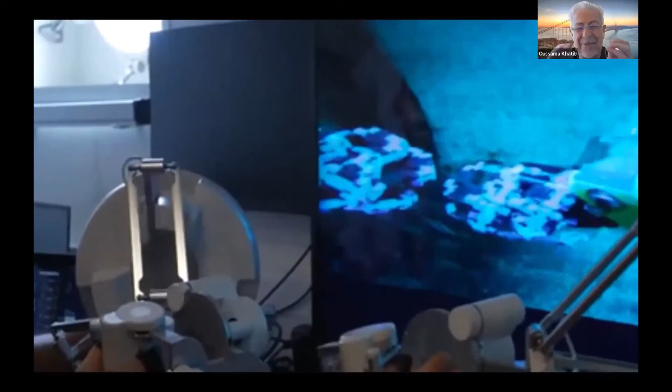Forward, down to the right, like forward. Slowly, we're almost there. Your hands on the... in the back. I have to come from the back to rest. Okay, I touch it. I feel it. Yeah, I mean with the back of the hand. You can feel it, put your hand. You can see the hands deforming, and you can feel it. It's amazing, you see it, and you are able to feel the contact. That was really, really incredible.

To experience. What is happening is we still have our old habits, and our old habits is that we are used to program robot joints to create trajectories, synchronize these trajectories to move. And this is not the natural way of controlling robots. So we need to take advantage of the new capabilities that is being offered to us. All this journey, I feel I'm still doing my PhD in robotics.

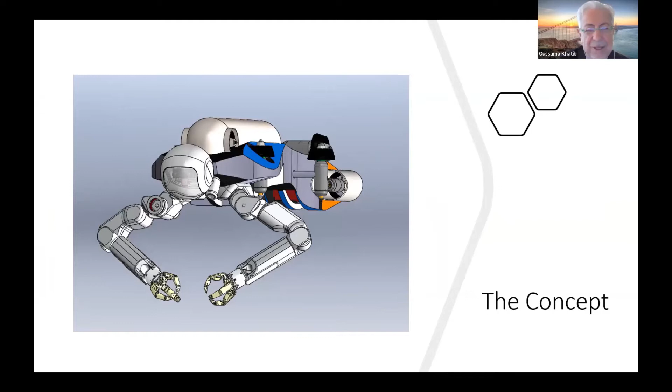The way archaeologists reach it is using a suit, which is very difficult to go inside because it's confined. To interact, you have these very simple grippers. It's very difficult interaction, whereas divers and archaeologists need to touch, feel, and interact with artifacts in much more dexterous ways. So we designed this robot to be a combination of mobility, manipulation, sensing, and vision.

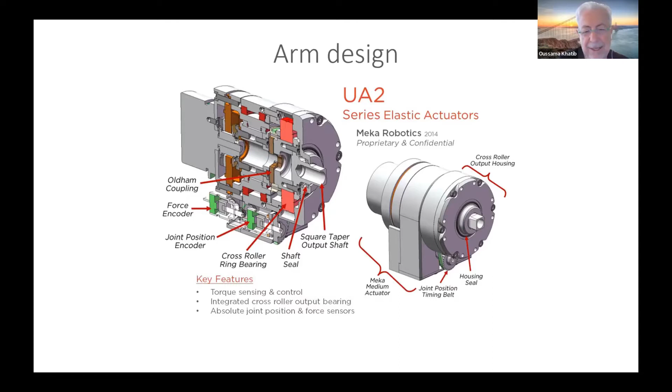This robot involved a lot of sensors. It's a very complex system, but we can also talk about the fact that this robot had to sustain the pressure, which meant a lot of new ideas in the design of the actuation and the hands.

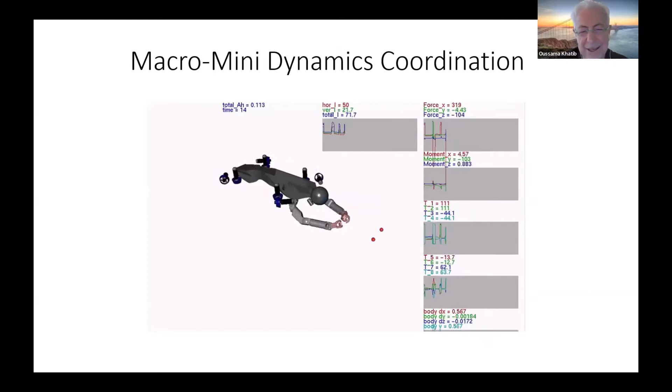The key aspect of the design is that when the robot is docking on any location, you can see the body of the robot still moving. There is coordination between a macro-mini dynamic system that allows us to take advantage of the fast dynamics of the arms to stabilize the system and make contact without exerting large forces.

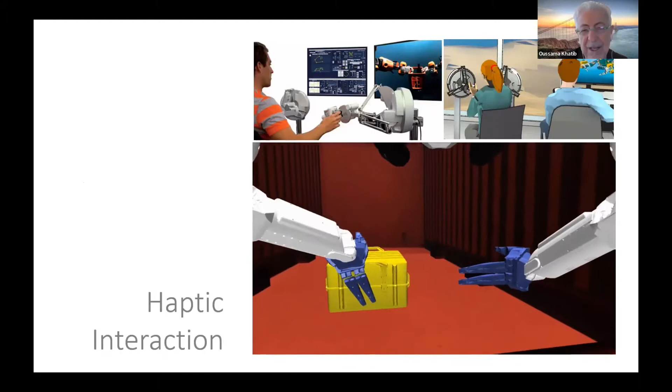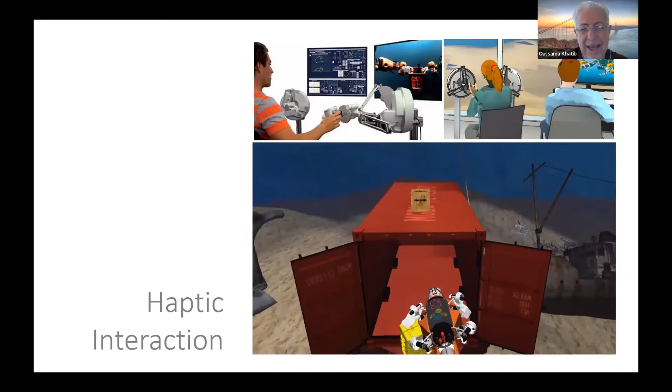OceanOne is here - that is the original one that was in the pool at Stanford. Most of the early development went through haptic interaction, involving dynamic simulation of the robot, so you can feel the objects you are holding and lifting. When visitors came to my lab, this was the highlight of the demos, because you wear these glasses, see in 3D, and interact with those environments through your hands and eyes. Everyone was able to do it, even a little child.

This was easy because of the way the interface was designed. There is a lot of dynamics reflected at the hands, and when the hand is extended, the dynamics become large. The effective mass at interaction becomes very important, so we had to make sure we take postures that reflect lower masses at contact.

When you combine two hands to hold an object, you change the dynamics again. We call this the augmented object dynamics, which allows us to control the robot properly.

The robot was deployed at sea on the André Malraux. Here you can see an image of the robot between the two cannons of La Lune, and also the haptic devices with which we interact - they allow us to touch and feel through the hands. When the hands make contact, we feel it in the haptic device, and it also helps guide the robot when needed. We also have stereo vision that allows us to see.

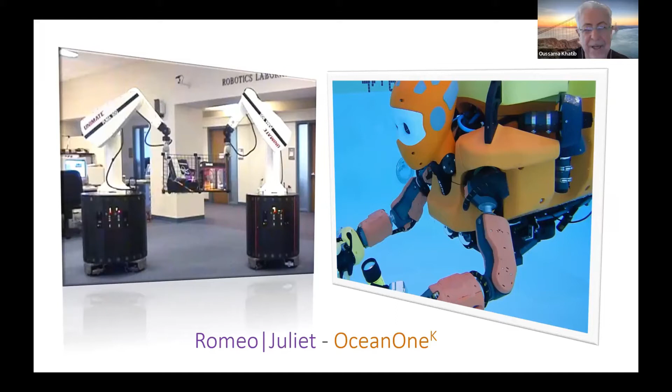Now I really want to talk about OceanOne-K. OceanOne and OceanOne-K didn't come out of the blue. They came from a lot of development we pursued over the years with different robots. One of the first was Romeo and Juliet.

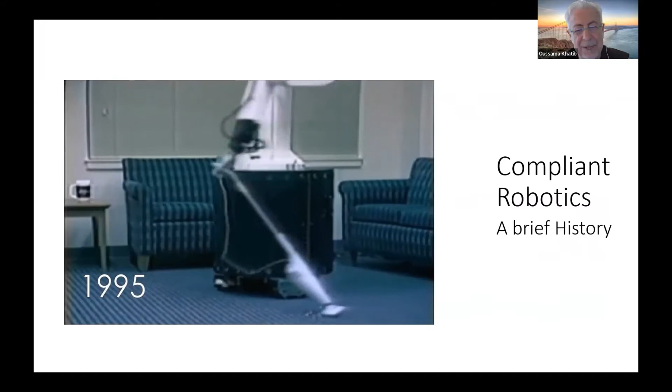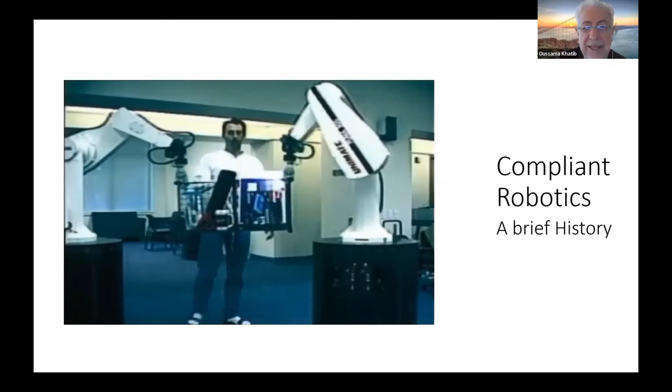Let me show you a little bit of Romeo and Juliet interacting with the environment and performing all kinds of tasks. This was in the mid-90s: ironing, vacuuming, two robots interacting compliantly, being guided, even moving and dancing.

And then all of that went to another robot, Asimo, that stayed at Stanford for many years. And then we applied this to human motion. All of this, in fact, led us to basically bring those capabilities to OceanOne.

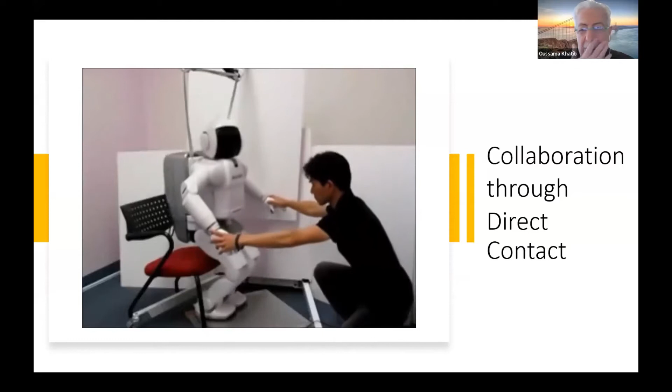I just wanted to mention at the Pinakothek in Munich, we now have an exhibit of Juliet at the design museum there, and it is very exciting to see it with the videos and all the things that they have prepared. So, as I said, collaboration is very important and it can be done directly.

Here the wrist sensors allow the human to guide the robot, whereas here we are using the haptics, and through haptics we are able also to interact with the robot and feel what the robot is touching.

So the other major problem building OceanOne-K was how we build the flotation, because we cannot just use the same material and increase the density, since the volume would be bigger and then heavier, and all of that makes the robot huge.

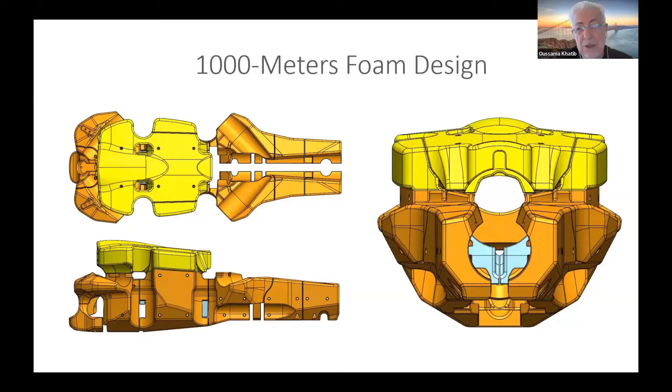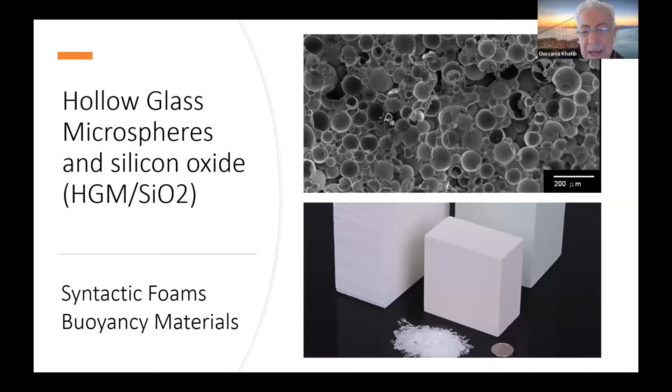So we found a new technology for foam design, based on hollow glass microspheres. These are amazingly strong, so you are able to go to 1,000 meters without the weight. The robot became similar to the previous one, a little bit heavier, but now capable of going to 1,000 meters.

The other thing I wanted to mention is this compensator that is connected to the tubing that goes inside the arm. These arms are filled with oil so that the pressure inside is equal to the pressure outside.

But at 1,000 meters, you have electronics, and all that electronics need to sustain the pressure. So we had to change all the electronics to make sure oscillators can still function. We went to solid state oscillators and all kinds of things for capacitors and all the electronics to make it capable of going to the sea.

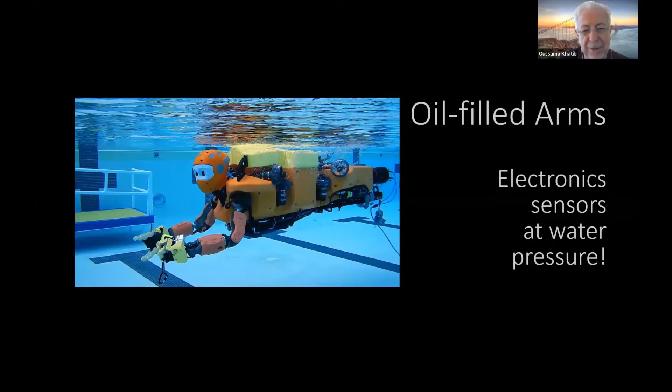Let me show you this short video about how the robot was tested in the pool. Here you can see the robot moving, you see the haptic devices, and you see how the robot can see through its eyes in stereo, and this is reflected through the interface to the human. Here we see the stereo, the two images coming from the cameras on the eyes of the robot.

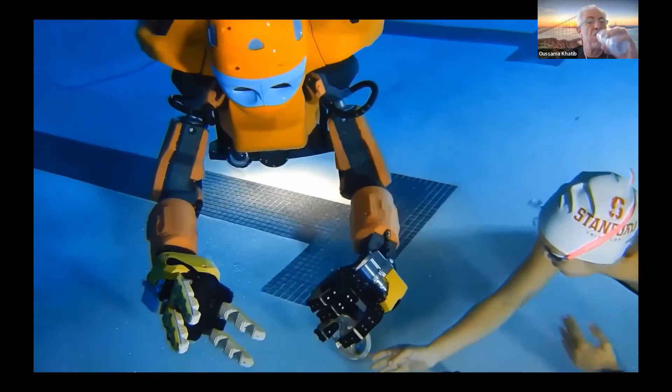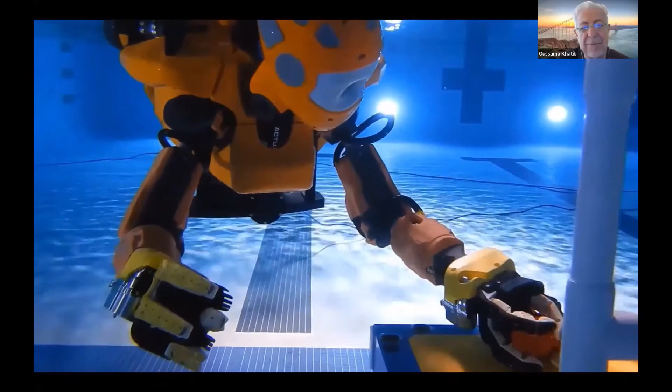The robot was learning how to grasp objects. Even if you miss it, the robot keeps moving and gets these objects. The robot was learning a lot of other things about how to interact with divers, or interact with two arms, manipulation, and use tools and all of that, in preparation for the mission in the Mediterranean.

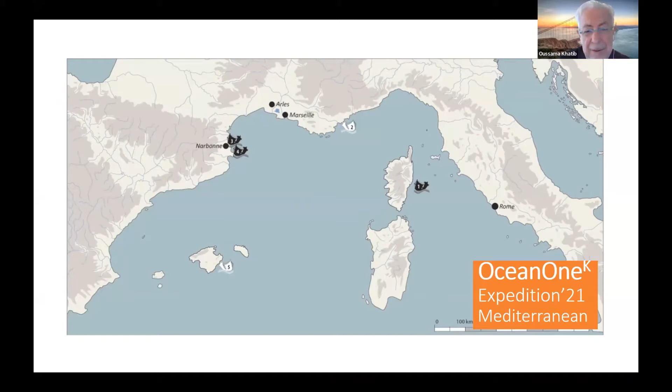So the mission started in September of last year, and we went to Marseille, then wanted to continue to Corsica. This was done in collaboration with our colleague at DRASM, Michel L'Hour, who was the director of DRASM from the Ministry of Culture, and we aimed to go slowly from 40 meters on the P-38.

The P-38 is one of those very famous aircraft from World War II, and Saint-Exupéry was flying one of those. Then we went deeper to 124 meters on Le Protée, a submarine that also was lost during the Second World War.

The plan was to continue to Aleria in Corsica to reach a second century Roman boat. It has beautiful oil lamps, and this area is amazing, but it's very deep at 350 meters. Later we wanted to go to 500 meters to reach Le Francesco Crispi, a magnificent boat that was also lost during the Second World War.

It has amazing marine biology with white corals, very rare, that biologists would like to get their hands on, but it's very difficult to reach, and difficult even to collect because they are very fragile.

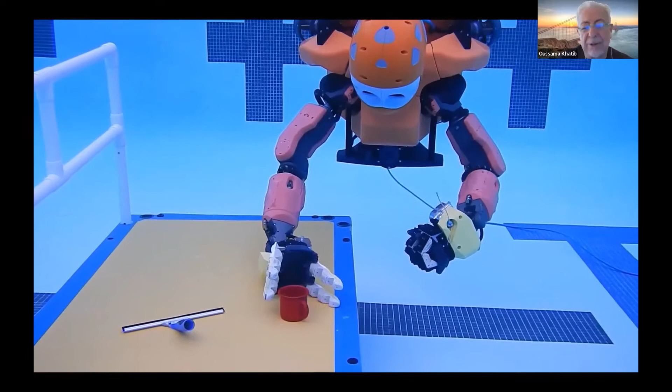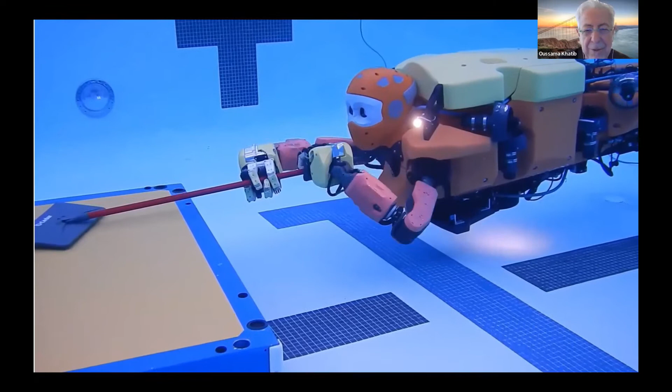So we continued the preparation of the robot at Stanford, and we were working on precise grasping. We were working on getting the robot to maneuver with a pole at the end of which you can have a scanner, cameras and light, and we built those with flotation so we can film inside enclosures that are difficult to reach.

We also had a collaboration with the University of Pisa, the group of Antonio Bicchi, who developed these under-actuated hands. You can see the 5-finger hands that were used. The first dive at 40 meters went to the Lightning P-38, and the second dive went to Le Protée. Let me show you a very short video about the diving on the P-38.